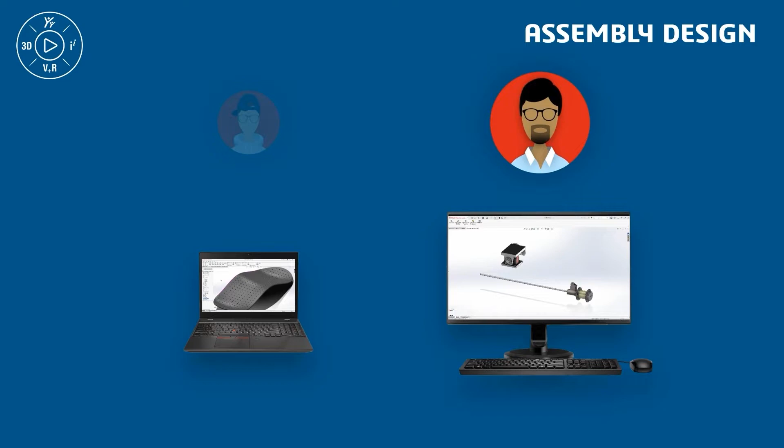Eric has already created a steering truck mechanism that allows the board to lean, and the push rod assembly that controls how much power is being delivered to each track, which steers the shredder left and right. He'll be making changes to the design, so he starts by reserving the assembly since he doesn't want to step on anyone else's toes in the process.

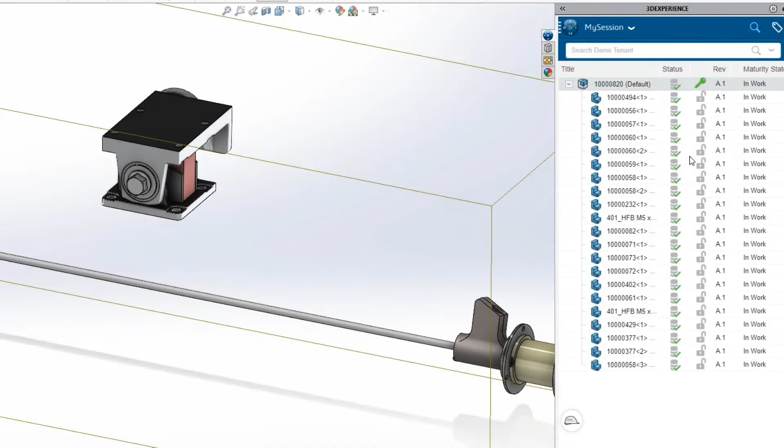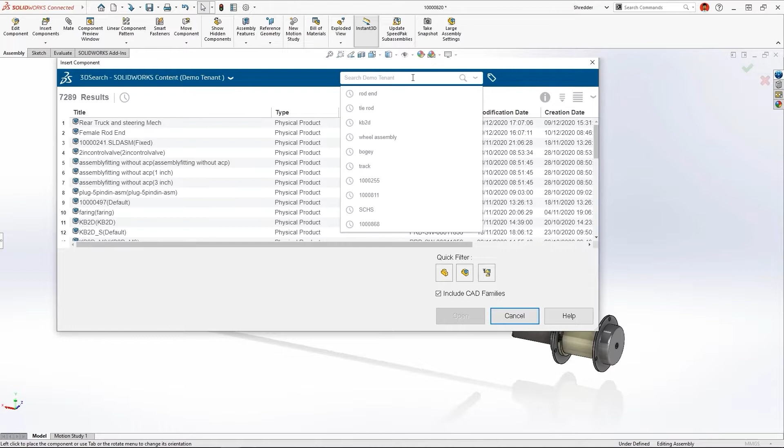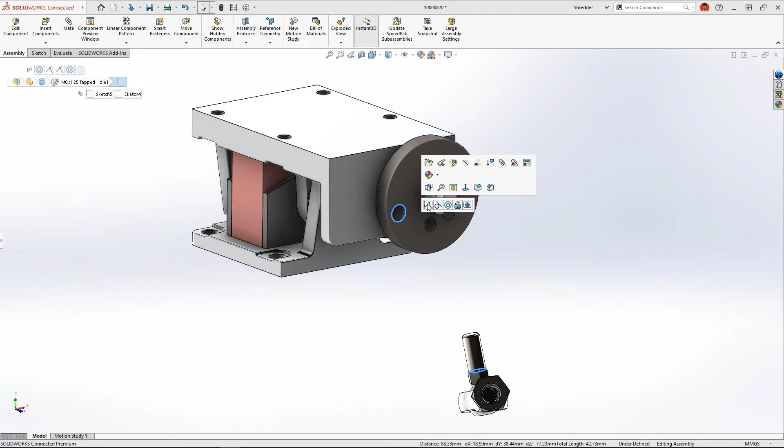Assembling the tie rod to the steering truck is easy. Clicking two circular edges, the QuickMates toolbar intuitively filters to just the ones that make sense. By making the adjustment wheel transparent, you can now click the cylindrical face of the tie rod end stud and the inner face of the curved adjustment slot. The slot mate option will work well and will constrain the stud to only be able to move within the limits of the slot.

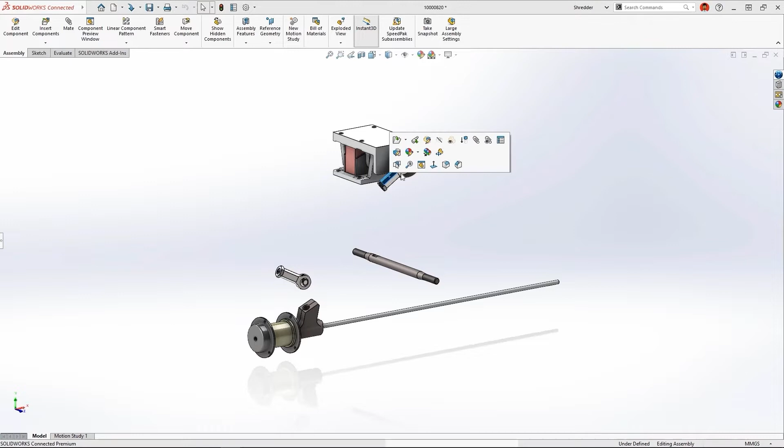For the next pair of mates, he knows that he'll need to access a few small internal faces of the rod end to mate it to the tie rod. By using Component Preview, he can rotate the rod end independently in its own window, while the rest of the assembly stays put in another window. The coincident and concentric mates are done in a snap, without having to move and rotate the assembly around searching for just the right faces or edges to click.

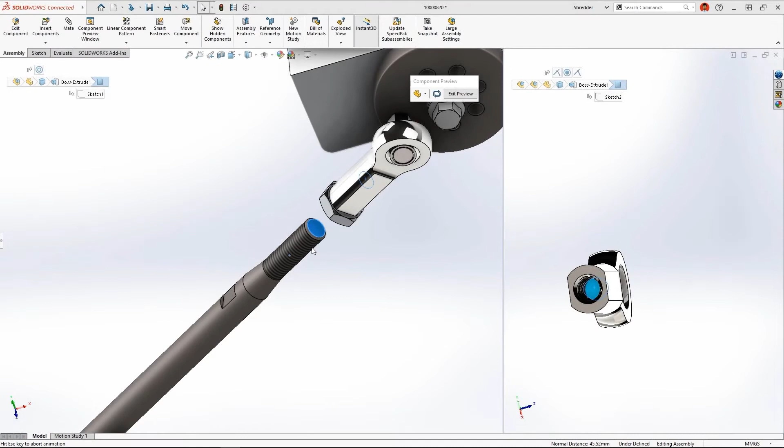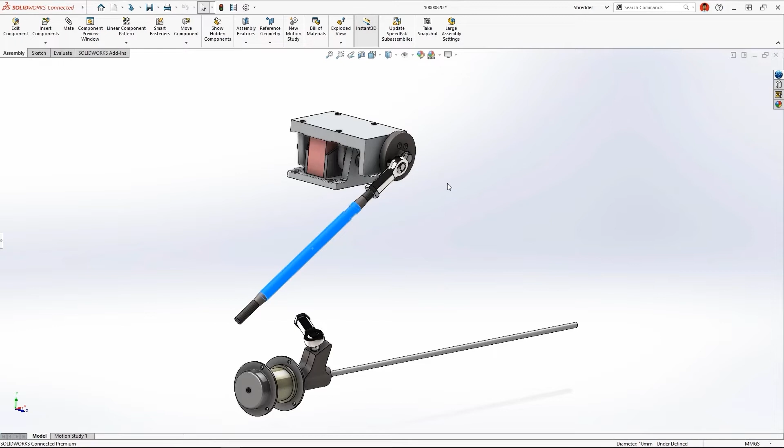Moving on to the lower rod end, he mates the stud to the push rod assembly, and then notices that the 170mm tie rod is just too short for the application. He changes the configuration on the fly, and then uses the Component Preview window again on the lower rod end to finish mating the tie rod assembly in place.

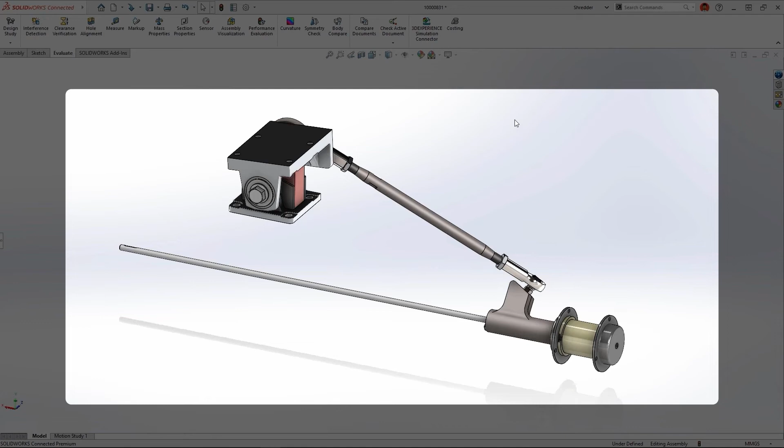Testing the mechanism, Eric can see that it's working well. Eric can see that the end comfortably hits the turning limits and is within the 1.25mm specification. All this without building and testing a single physical prototype. Finished with the steering mechanism, Eric saves his changes. He unreserves the assembly and saves his changes up to the cloud.

Data reuse by leveraging all the great data centralized in the cloud library, quickly mating everything into place, and virtually testing its function made this assembly task quick and easy. Eric's next task is to add comfort and control to the riding experience by tuning a bushing that will add the proper resistance when the rider leans the board.